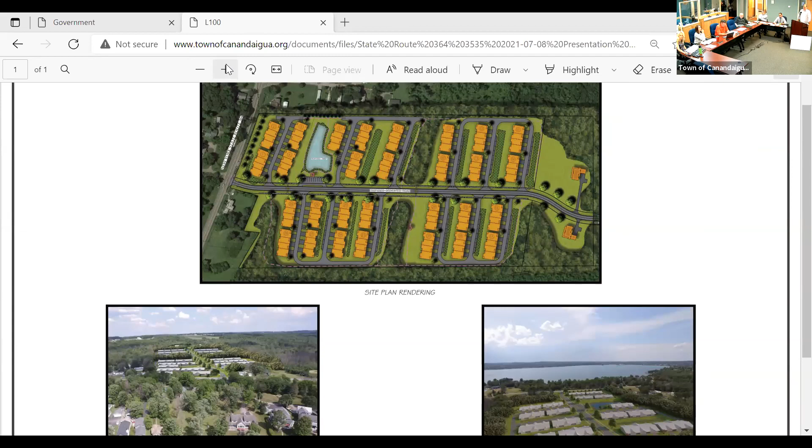There'll be private access driveways to each of the townhome units north and south of that dedicated road. These units will be marketed toward young professionals, empty nesters, people selling their estate and trying to downsize, whether they're snowbirds or permanent residents of Canandaigua.

Some of the comments from the last meeting, which I outlined in the letter on July 1st to the town planning board, were about sidewalks and crosswalks. We've added sidewalks on both the north and south side of the dedicated street, and added 2 crosswalks, one at the kiosk area and one at the gazebo area, for pedestrian access through the site.

These will be raised crosswalks to control traffic speed. It's going to be a 30-mile-an-hour road, but you don't want to hit these raised crosswalks at 30 miles an hour. We provided a landscape plan with the set.

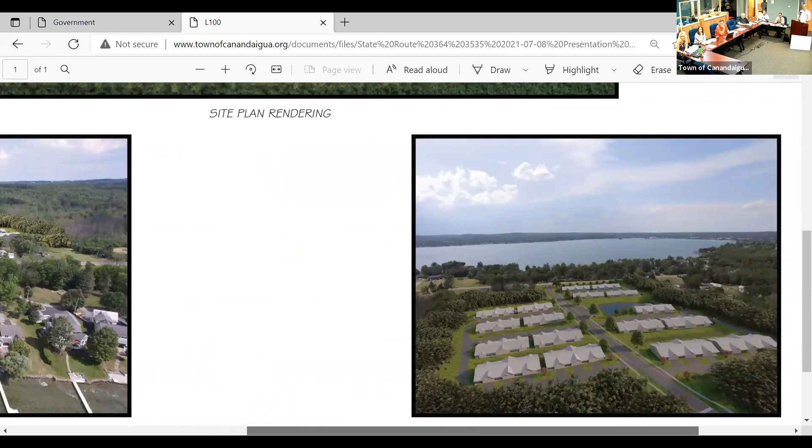We've also provided this landscape rendering and some perspective views of the project. That was one of the board's questions: how is this going to look? If you scroll down, there are perspective views. The one on the left is from the lake, about 100 feet off the lake surface - that's what it would look like. On the right, it's as if you were flying over from the back, from County Road 18.

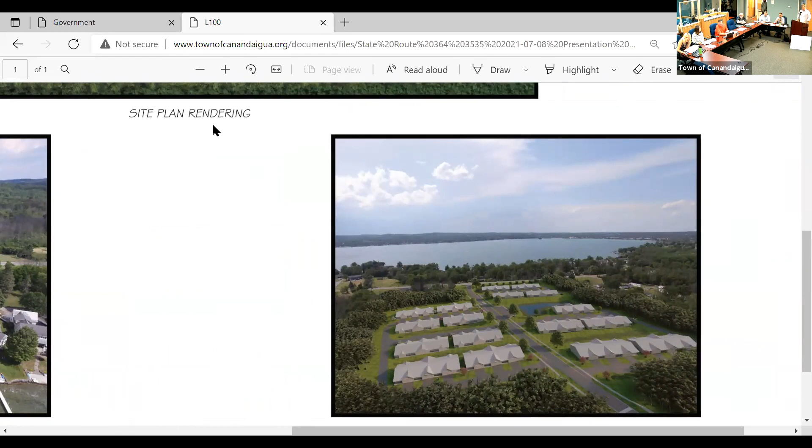Another question was about building materials - what are these going to look like? We provided pictures of a project being completed by the same developer, ATL Contractors, in the town of Milo and Penn Yan. These will have similar appearances to the Seneca Shores development in Penn Yan and Milo: vinyl siding, earth tones, cedar shake gables, townhome appearances - pretty standard for most townhomes in the area.

We've added some fire hydrant locations - I'm not going to elaborate on that anymore. In terms of trash pickup, these will be toters, private toters stored in the garage of each townhome unit.

One of the comments Gary had was about the intersections of the driveways, and whether there was a way to stagger the private driveways on opposite sides of the dedicated road. We let topography and elevation of the site, including a steep slope region in the center, drive the layout. We did not think aligned entrances opposite the dedicated road would present a safety concern, though it may cause a little traffic confusion since this is a low traffic, low speed road. If we were to align them, some entrances would be at a skew angle, causing a safety concern due to blind spots.

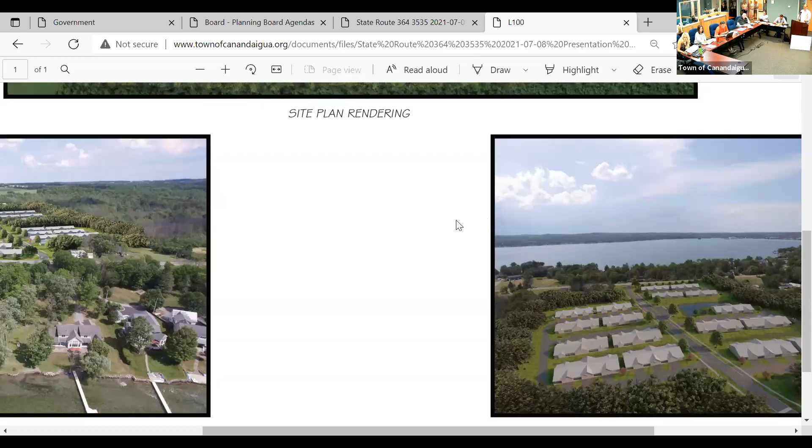In addition to the driveways, I want to talk about traffic, because I know this will come up. We've provided a traffic impact statement for the project showing the generated traffic for the development versus traffic on 364 and County Road 18. It does not merit a dedicated turning lane on 364 — it marginally warrants one, but only during peak time, not AM time, at a level of service of C, which is generally where you may tip toward needing a dedicated turning lane. As for green space, we are proposing 40% green space, which aligns with the mixed use overlay zoning criteria.

In terms of wetlands and streams, it's been identified that there may be some on this site. We've gone further with Environmental Resources LLC to identify and delineate possible wetlands. They walked the site and identified a small wetland in the southwestern corner, approximately one-tenth of an acre in size. It is non-jurisdictional in terms of DEC or the Army Corps of Engineers, and not mapped. We've solicited information from the Army Corps of Engineers regarding jurisdiction. If it comes back non-jurisdictional, it won't be enforced or controlled by anyone, so we'll be able to remove it.

There is a ditch that crosses the site from north to south, about where we have that stormwater management pond. The ditch is dry right now — we sent in a picture showing how the water doesn't flow in it. It is not a classified stream by the DEC, and again, it's non-jurisdictional at this point.

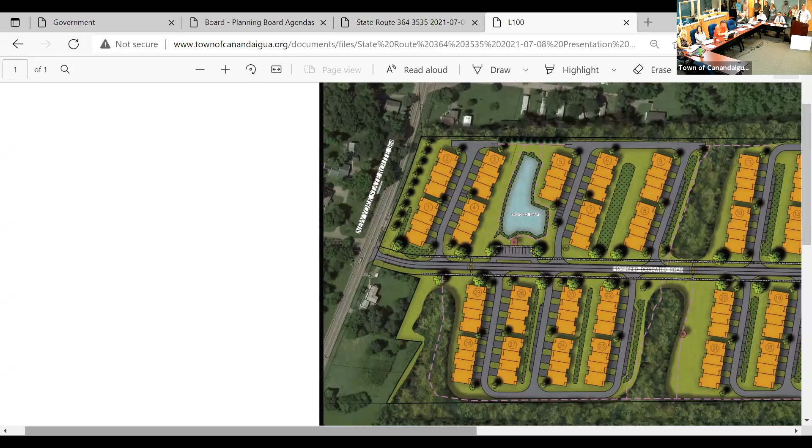Brandon, is 1 and 2 actually on top of the knoll there, where 3 and 4 go down into the dip? No, actually, they're gonna be recessed. And they'll be approximately, I want to say, 6 to 7 feet below the East Lake Road.

Yeah, that would help with the sight, but it would also help to keep those trees there. And plus it would help with the runoff, not tearing up the trees right there on the road. So 1 and 2 units would be 7 feet lower than New York State Route 364.

It'd be great if we could keep them there and keep the drainage. Yeah, I want to clarify a little bit of that drainage, Bob. The low point of the site is approximately 200 to 300 feet off of New York State Route 364.

And that low point is where the ditch has been noted, and that's approximately 19 feet lower than 364. So it goes down 19 feet to a low point and then goes up the hill. So there's no opportunity for water to run straight down this new road and back up on 364 - it'd have to be a 19-foot swell.

I understand it totally, and I'm glad you said that, because I walked that property and I was like, I'm going down, down and down before I go up again. And that's where I would assume there might be even a retention pond behind 29 or something like that. Or where's the water run - does it run to the north or the south there?

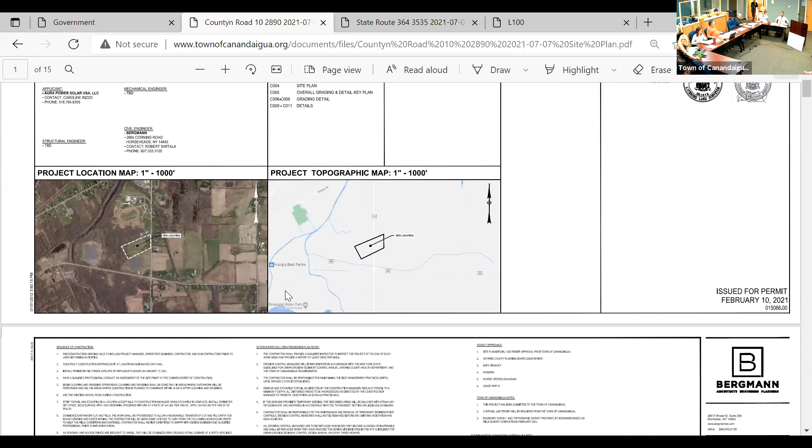I thought I read that there's still discussion going back and forth between DEC or the Army Corps of Engineers as to whether that's a prohibited wetland area, and if so, you can't do anything in that area — drive piles or pilings into it, or whatever.

The short answer is you can do anything in a wetland as long as you get a permit from the Corps and/or DEC. It's not necessarily prohibited. We've already gone to that step and requested a permit, submitted a full application, a copy of which has been provided to the town — a joint permit application to DEC and the Corps of Engineers.

We are under a tenth of an acre of permanent impact, so we didn't have to submit a pre-construction application to the Corps, but we did so anyway just so we could have that letter, that permit, back from them. We're under the threshold — if you're under a tenth of an acre, you typically don't have to even apply for a permit.

We also went to DEC because we have temporary impacts to wetlands that are over a quarter acre, so we're required to get an individual water quality certification. The letter in your packet from DEC is a notice of incomplete application, because they cannot act on that permit until you issue a negative declaration.

At which point they will issue that permit. I know it sounds a little chicken-and-egg — you cannot issue a permit in this state without SEQR being completed.

The Corps is a federal agency, they're not bound by that. And the town through the review did require a jurisdictional review be done, which was done and entertained. As Dave mentioned, they've already submitted the permit application to the Corps to obtain that permit, which technically speaking they're under the threshold. So when you're over the threshold, you're obligated to get an approval and a permit, and a lot of times associated with that, you're obligated to do mitigation. This is under all those thresholds where they don't have to, but they still requested a permit just to get approval to allow them to do this work, even though it's not required.

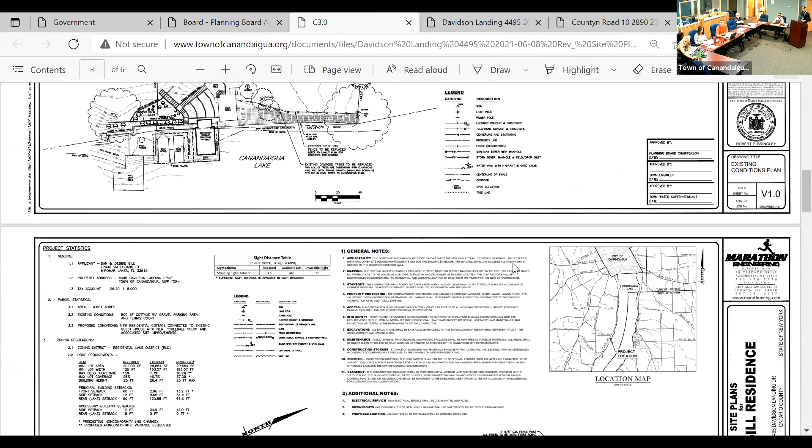As mentioned, we went to the zoning board, and there's the site plan. The shaded area is the home, and it includes a lot of outdoor spaces too within that, so it's not entirely enclosed. There's some covered patios, some entry areas that tie it to the property. You've got the associated driveway with the improvements and the pickleball court.

Overall, in the project, the impervious area on the site is going down—it's being reduced quite a few percent. That was achieved by eliminating the existing guest house and, as mentioned, positioning the new structure thoughtfully to maintain the green areas. There's a pickleball court so that they can stay active on the property, and we'll be updating the dock area as well to match the architectural improvements of the property.

Debbie is on the line. I'll let her quickly introduce herself to the board and say a few words about the Gills' history on the property and what they're looking to do with the project.

Hello, how are you? Debbie Gill, 4495 Davidson Landing. My husband Dan and I have been going to this property for over 35 years. His parents owned this property and the property next door, and we've known the neighbors for 35 years. We really understand what that street represents, and we're trying to keep very much in with what's appropriate for that street, hoping to make a house where our family, which has grown now to large sizes, can go and enjoy our vacation as well.

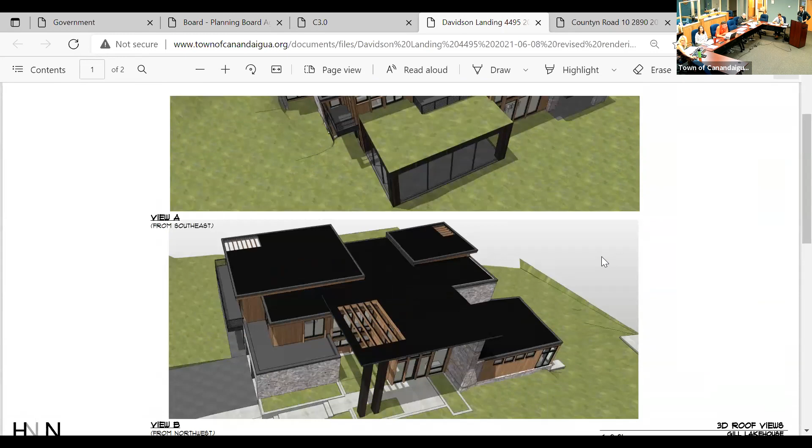If the board has time, I'd like to give David just a few minutes to step you through this building. Sure, it's certainly an interesting building. Tell us about the grass roof—with sheep up there?

Good evening, board. David Hanlon, Architects, representing the Gills. They requested something a little more contemporary in style, which lends itself to the building height requirements, because it's tough to achieve 25 feet with some of these sites. So the style they're looking for, as well as the town's requirements, kind of went hand in hand.

We also tried to get the building coverage down as tight as we could. The building coverage is actually under the town requirements—it's just that we have some horizontal nature to the roof overhangs and the porch, and that's where the variance came in. But we mitigated that with a green roof over the large porch that faces the lake.

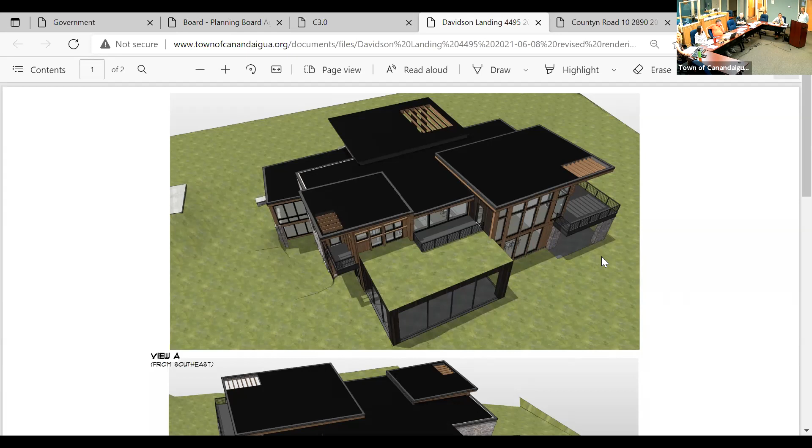Otherwise, it's just—I hate to use the word contemporary, but everybody kind of knows what that means—and it has a lot of natural materials. We show a natural wood; it might be cedar, or a different material with a pre-finished quality for better maintenance. There'll be a mixture of wood, stone, glass, and some metals, keeping the building low and horizontal in nature, using natural materials so it settles into the hill. Davidson Landing has a hill that rises up behind it, so the building settles into the landscape there.

And that's just a quick summary of the project. Very nice, yeah, thanks David.

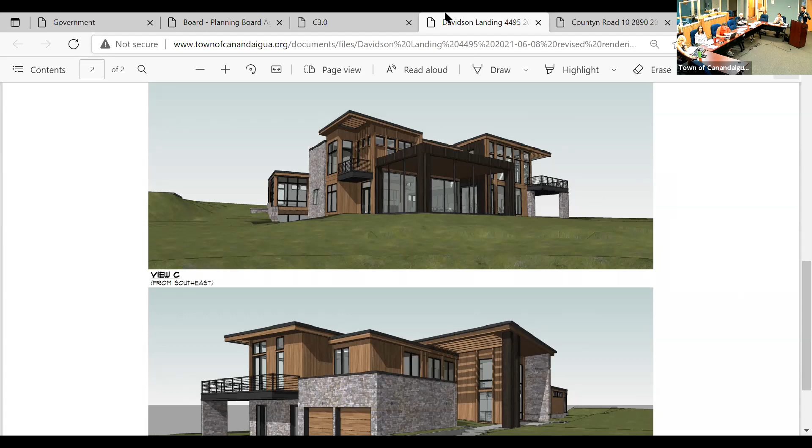What these renderings don't show is the landscaping that'll be existing, preserved, and proposed to enhance the property, complementing the natural materials in the building. Those materials will be repeated throughout the site. A lot of the walls around the site, what you might call retaining walls, aren't really retaining walls — they'll be landscape boulders creating a natural look across the property.

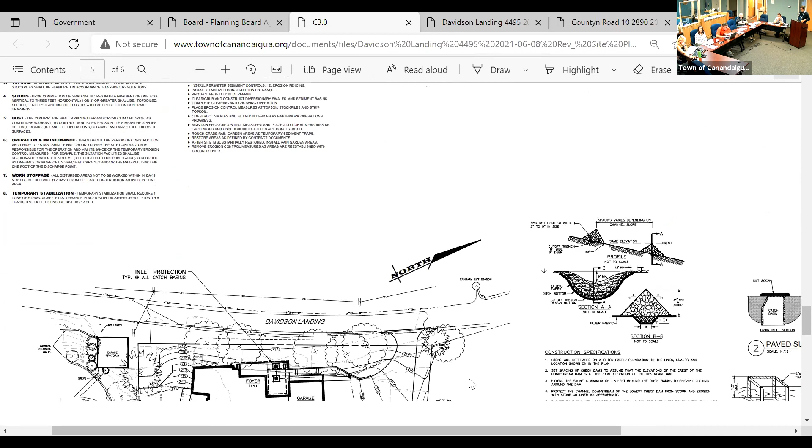David mentioned building coverage, and we talked about lot coverage, doing everything we can to get those down. The stormwater will be treated with a rain garden, so we're reducing the impervious area. We're incorporating a green roof to mitigate impervious impact on the property, and whatever impervious area is left will discharge to the rain garden, further improving stormwater conditions. So not only are we reducing runoff by reducing impervious area, we're treating it well with the rain garden.

The Gills are also incorporating geothermal elements for heating and cooling the home, which adds an environmental improvement to the project.

Is that shown on the plan, where the geothermal field would be, or is it out in the lake? No, that's not on the plan yet — it'll be on the building permit plans, how that's achieved. It goes straight down. I know it goes straight down, but what's the area of influence — where are you thinking of putting it on the lot? It'll be straight down under the home. Under the home? No, to the east or north of the house, near the pickleball court. Oh, near the pickleball court. Thanks.

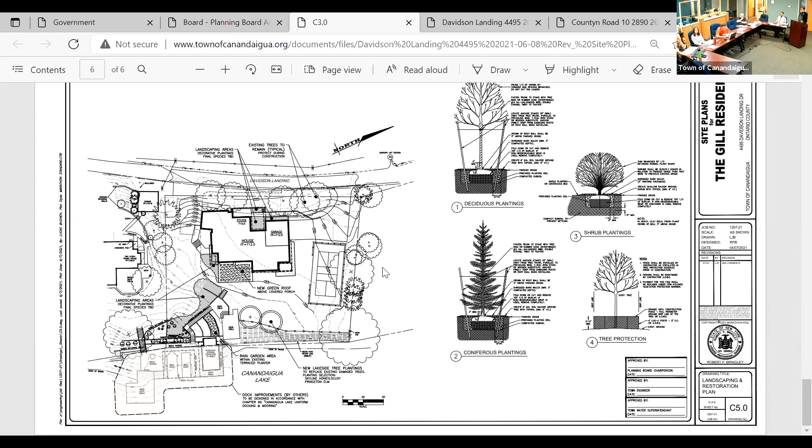You're obviously concerned about shoreline guidelines and making sure they're complied with. I know you've got a lot of existing trees that'll help meet those standards. You're taking one tree out that's become infested with some kind of bacteria or ivy — yes, there's a bacteria growing, so where you see the two new plantings, those are replacements, because those trees are in a compromised position. And you've got a couple trees coming down for the driveway, correct, on the northwest corner of the property. Those will be a maple species or honey locust to match the other trees along the shoreline.

Do you have any concerns about the shoreline or the view? My only concern was, I don't know from the lake how much of that pickleball court you're going to see, and I was wondering if there should be some plantings in front of the fence on the east side of the pickleball court. That's one of my notes — maybe some shrubbery along the pickleball court so people aren't just looking at people playing pickleball all day.

Gary, I was down there, and that tree by the lake is pretty massive — it's a huge shade tree. My concern on the pickleball court is how the water is going to run off of it. That's a good point, if I could speak to that — the tree is really low hanging as well, not only massive but low hanging, so it does provide a visual barrier on that corner of the property.

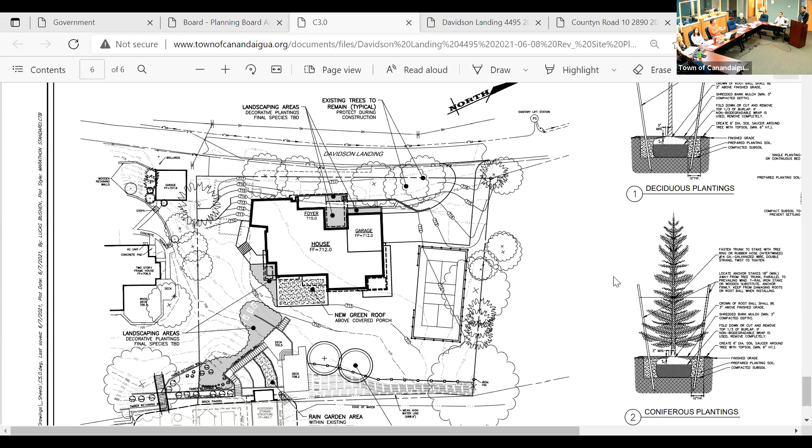Can you talk more about what you're doing down by the lake there? How much of that is new, how much is existing, how much is repair versus replace? What's going on down there? Also, I don't know if this is legal's opinion, but it appears there's work being done on two different properties down there, jointly. Do we need another permit from that other property? Do we need an easement? That's the whole thing that concerns me.

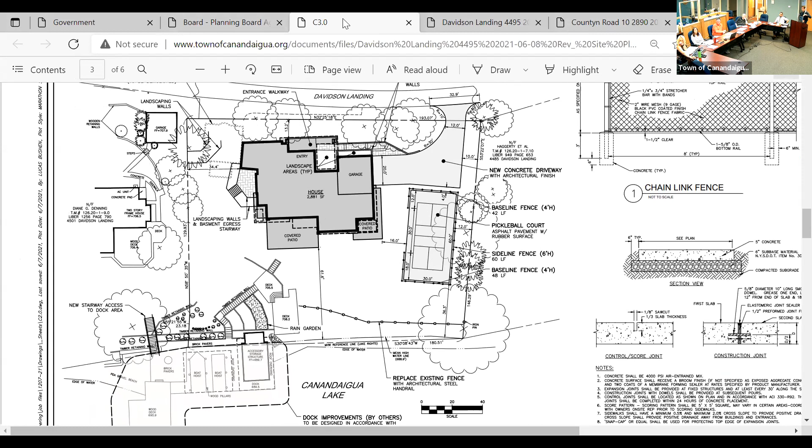So I talked about this with Chris Jensen. The work on the neighboring property, which is the sister's property, is just providing her another stairway access to the lake, offsetting that by eliminating some stairways she has on her property. That will be a separate permit. The way he wants to handle it is that it doesn't rise to the threshold of a site plan, so we're showing it here just informationally.

Same location—are you kind of replacing the stairs? There was a stair there in the past, yeah, that was removed at one point. So in order to make both properties function on their own, they want it back. They're going to give up some other stairs, but that'll be its own building permit application, just shown informationally on this plan.

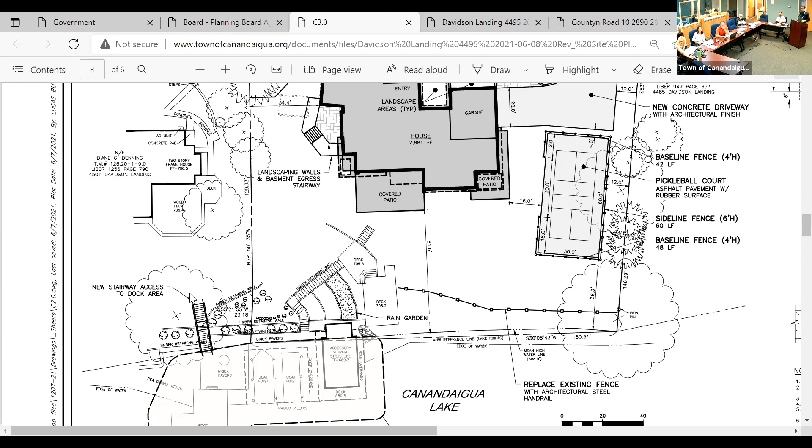Good, okay. You're talking about the dock area in terms of what's happening down there, that whole area—there's a lot of... You mean the shrubs snaking around? I'm not worried about the shrubs, I'm worried about the retaining walls—is that all new, or is it being repaired? It's all existing, it's all there today, it's all timber retaining walls.

The idea is just to update those with some stone and natural materials, some updated landscaping. And those steps are starting to wear out, they've been there a while. So the idea is a similar access down to the lake with a stairway and some terraced landscaping.

The rain garden is new, right? The rain garden is new, yes, but everything else is just repair. Everything else will be updated with new materials. The deck sitting up there will stay and will be updated as well.

Is that rain garden—I know we sometimes have concerns about the outfall or overflow of the dry well being too close to the lake, that it would surcharge and go right into the lake. We try to keep it some distance back from the lake so it runs overland before—how close is your surcharge or plunge pool, whatever you want to call it, when the rain garden fills up and overflows?

Yeah, I talked about this with Colin from MRB. The discharge—it's probably about 10 or 15 feet that it'll run through a rocky riprap area.

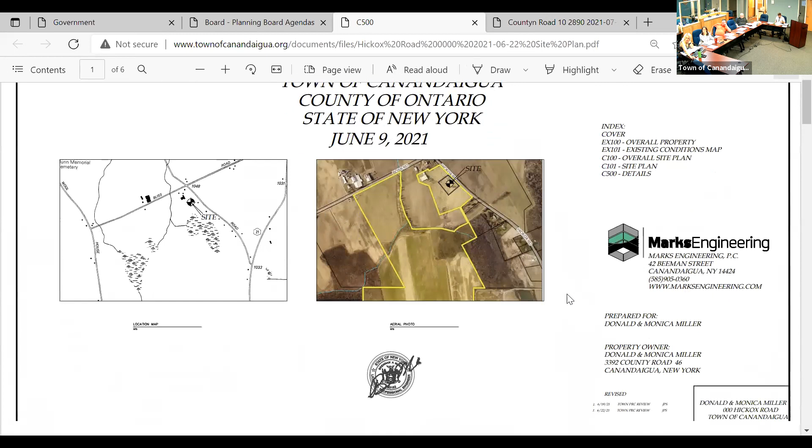We're looking at a new residence, right before the corner of Hickox Road and Bliss Road. It's a recently subdivided parcel, about 12.5 acres of vacant farmland. There's an existing barn in the lower corner that services another portion of the property, and there's also a DEC wetland located in the southwest region of the parcel.

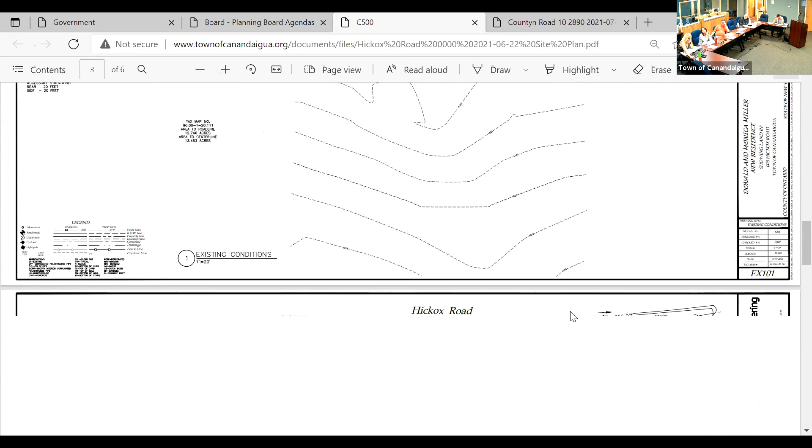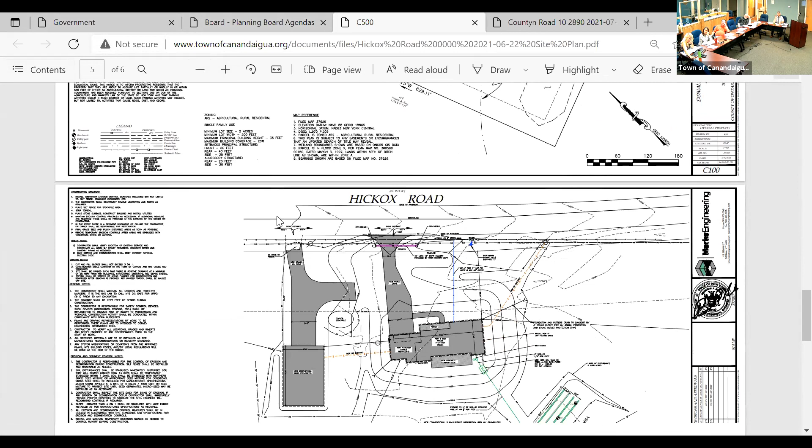What the Millers are proposing is a single family home, a 3-bedroom house with an attached garage, patio in the back, and an agricultural barn as well. If you scroll to the next page, that shows it in respect to the whole property, and the next page will show the actual plan itself up close, which will give you a better idea of what we're looking at.

They would like a new conventional subsurface wastewater treatment system. We've done perc rates out there, everything's looking good, we did a deep hole test. We've accounted for stormwater runoff, trying to move the water away from the home. They'd like this additional gravel drive because they'll have to be pulling in equipment and they'll need to turn around in that drive to back that equipment into the barn.

I've also got architecturals from Morabito Architects out of Pittsford, New York. I don't think they're with us today, but it can give you a good idea of what the house looks like if you'd like me to screen share that. I'd be happy to answer any questions the board might have about the house.

Also, Don and Monica, if you'd like to introduce yourselves, you can come on and just say hello. Totally up to you, they're here. Hello. They're shy.

We kind of rushed here, so I don't have the site plans with us. But it's ranch style, 3 bedroom, 2.5 bathroom home, single story.

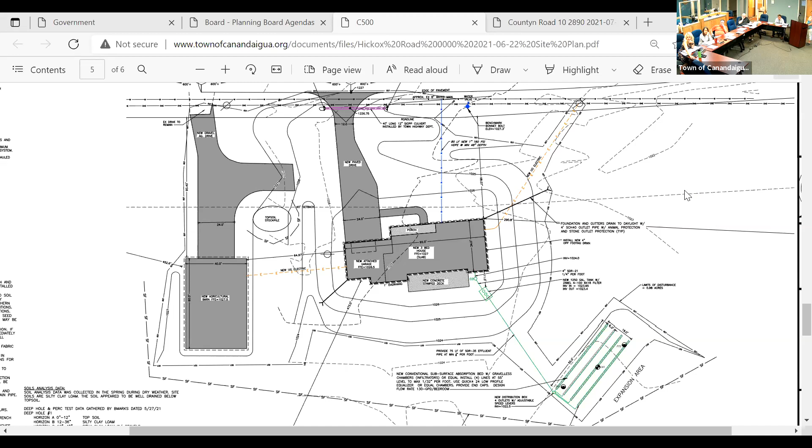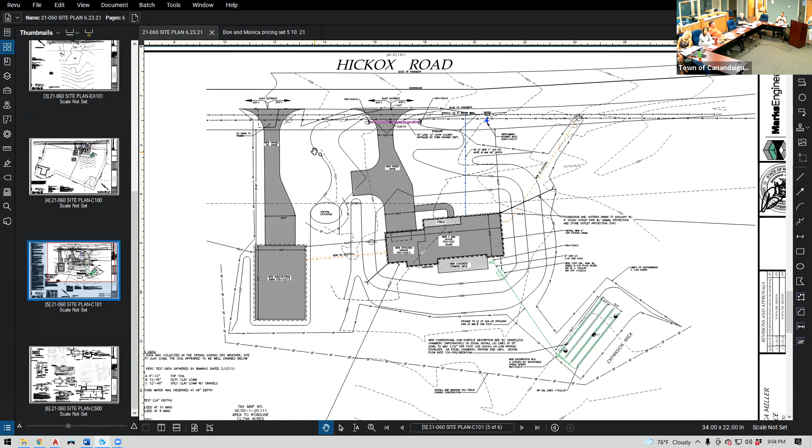Regarding siding colors, we have a neutral siding - is it cedar shake or what? We're going to do vinyl siding, dark blue or dark gray, nothing decided for sure yet. We have possible builders. Obviously not bright pink or anything like that - though I think Don would allow bright pink. No, doesn't match with the farm.

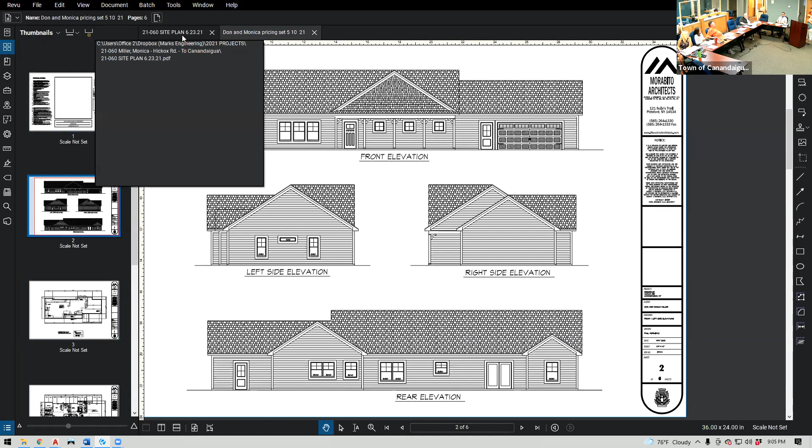The existing barn you have out there in the corner, is that being used or is it continuing to be used? Yeah, our farm uses it. Are other properties going to have to access that barn? No, it's on your property, you're the only one that uses that barn.

Right now we use a driveway coming through the neighbor's as a right of way, but with what you're doing here, would you be able to get to it another way? I can just drive across that field into it if I want - it's just an open field, used to be a pasture lot.

We used to have cows in there for years. It just sits idle now - we sold the dairy, so it just sits there. Is there an actual driveway of any sort that goes to that barn? There is, around the backside, it goes through my cousin's property.

So there's an actual driveway that goes there, okay, but through a different property. So if the cousin would sell and the new owner said you couldn't use it anymore, would you still have access across his own property, I guess? Yeah, that's right, that's fine - we'll figure that out.

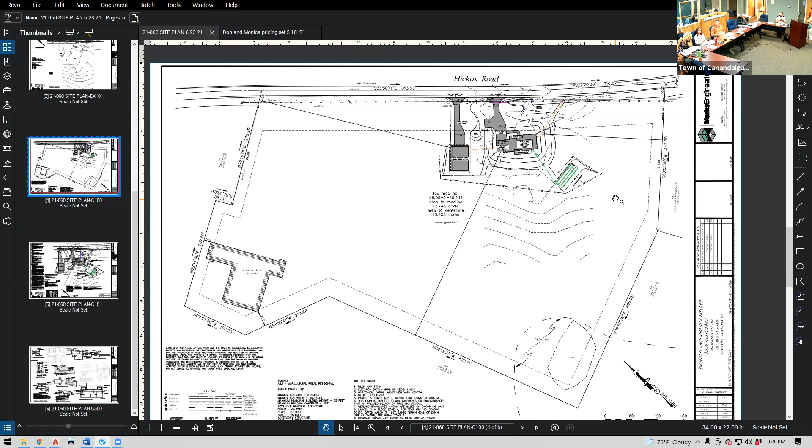So you have two driveways, one being an ag driveway and the other for the residence. I think Chris Jensen had responded about two driveways to a single property, something like as long as one was ag-related. The one to the home is going to be paved, right, Don?

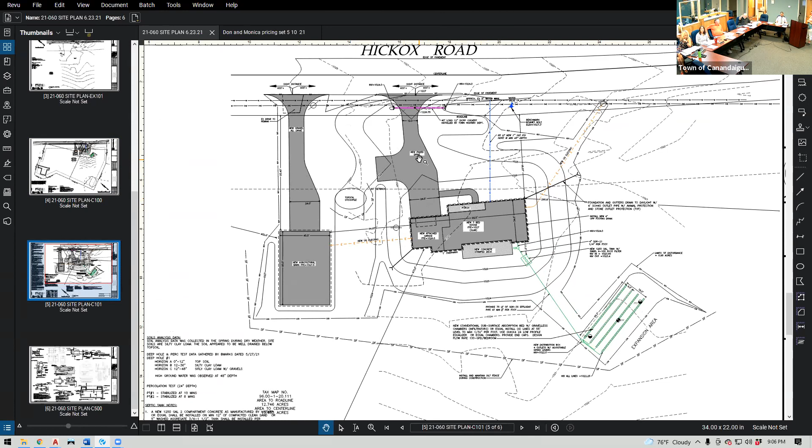Yeah, the full driveway. And the one to the barn will be stone, except for the portion near the apron. That's what I just wanted to clarify.

I see you have a new driveway culvert that'll be installed by the town highway for the house. Actually, I don't know why they'd put a culvert there, it's just flat, there's no ditch. So the blacktop can come right off the road. But you need it at the residential.

The reason for the paved apron, in case you weren't aware, is that the town road requires all driveways connecting to their roads to have a paved surface so the stone doesn't get washed away during winter maintenance. So everything inside the right of way has to be a hard, paved surface. Everything beyond that point can be gravel.

Peter, this is Bob. I had a question. On the picture I'm looking at right now, it's opposite of what we just saw—the turnaround was on the barn side and not the house side. Which one is it? I think we've actually changed it since then.

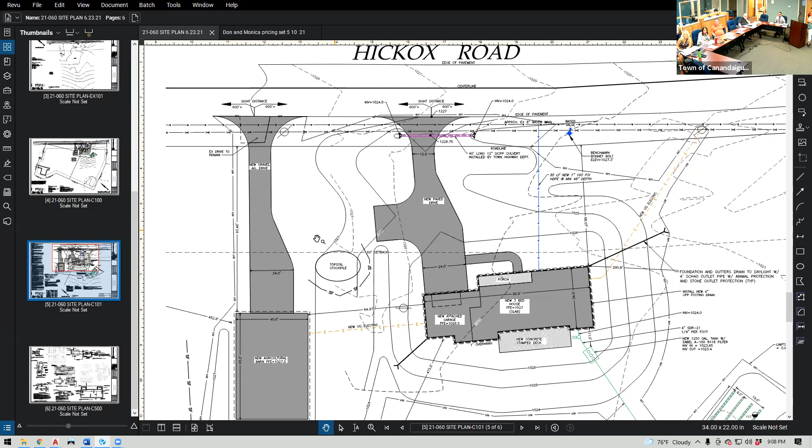I thought we had the same copy here. We originally had it coming out to the right over here, and then I spoke with Monica and Chris Jensen, and I realized Monica preferred it to be over here for a turnaround for the garage. So that must be a mistake on my part—the plan we have is incorrect. Is that what you're saying? I'll let Monica clarify, but I believe this is the design she wanted, shown on my screen.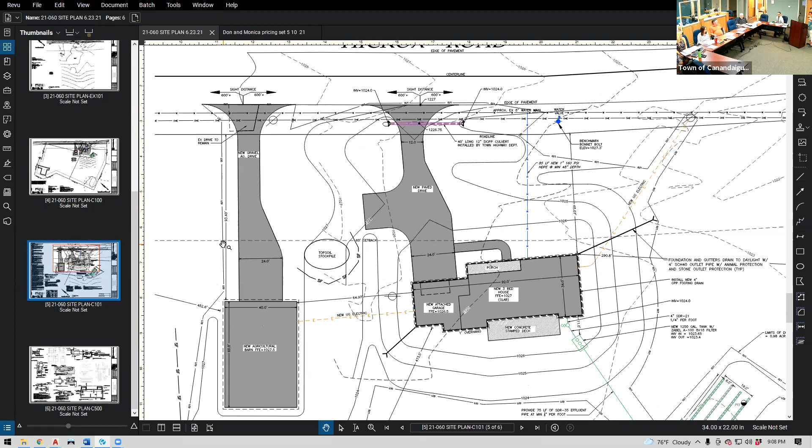Is that the last rendering? I've seen a few pictures. Yes, both—I do want the turnaround as pictured here, but we will also need a turnaround on the other driveway for agricultural farm equipment, like a back-in area for purposes, like Pete had said earlier.

Why don't you connect the two? You don't want to? There was an issue—I don't think you can do that. You've got to separate the ag driveway from the home driveway, because if they're connected, the agricultural use would be tied to the residential use in theory, and therefore it would require a variance. You can't have two driveways connected. So you have to separate the two.

Thank you, I was just saying how it reads. But for my instance, the plan we saw on site is not the correct plan—that's what I'm trying to get to. Yes, you're correct, both driveways will have turnarounds, but they will not connect. Yeah, you're right, Bob. Thank you.

Will the two turnarounds be facing one another, or facing the same direction—meaning, will they be close enough that you could in fact connect them? No, they won't be facing one another. I won't drive on that end; I don't know that I have an issue with it, I was just curious. I wouldn't drive on the other end because the machinery will wreck the asphalt—it's too heavy. So you don't want them connected. Right, no, they won't be.

Okay, as long as we somehow reflect that the final site plan will show the two turnarounds, the ag driveway and the home driveway. Okay, that's simple enough—we will make you come back for that.

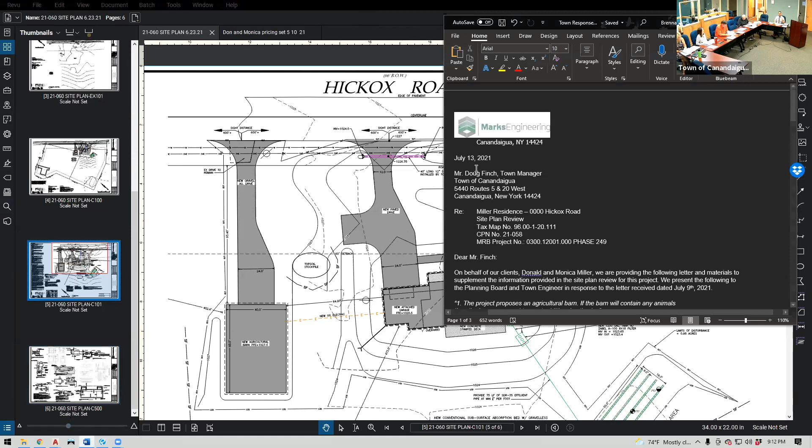So you reference it in the resolution? Yeah, so my letter's referenced in there that covers the apron, but I added two conditions: one, Jim Fletcher's comment letter being a condition of approval, and the other was the final site plans to show the additional driveway turnaround for both the barn and the residential house. Are we good? Anything else?

All right, I'll take the formal motion on both the SEQR type 2 and the site plan. I will make a motion for SEQR type 2 action and bundle that with the site plan approval for 058 at an undisclosed address at Hickox Road, with 8 conditions written during our discussion here this evening. Have a motion? Second from Gary.

The conditions include the set aside for the park. It does, site plan, okay - it is condition number 6. And the motion, second, all in favor? Aye. Opposed? Okay, motion carries. Thank you, folks.

Are you from the area? Well, you said your brother lives - is family, their family, his farm, family farm. Oh yeah, okay. I've been here - oh, Miller. Miller, yeah, the Miller, one of the Millers, yeah. One of the Millers. All right, sweet. Thank you, guys.

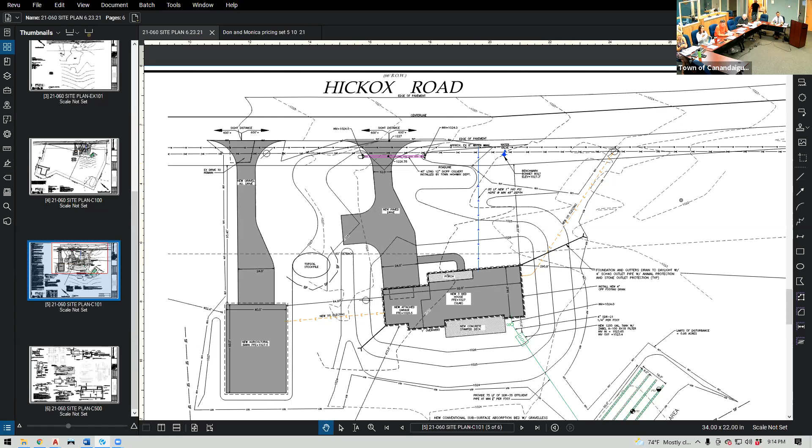We'll move on to the minutes from the June 22nd meeting. Yikes, can't do it. Can't do it. Gotta move that along. Okay, we'll have to postpone that, so just make sure that shows up on our agenda next meeting. Shauna, we have a full board. Referrals from town board.

Hopefully you folks have looked at the comp plan update enough times, as well as the form-based code, and we can sit here and talk about it. I'm certainly comfortable because I've seen it enough times in various committees that I sit in on. Do you have any issues with the comp plan update? No, I'm gonna go to that form code meeting Thursday evening, so I'm hoping it'll be very informative - that's gonna be a good, interesting concept. I unfortunately will not be available.

Be comfortable after that. I have just a couple of things I want to say - on the comp plan, not trying to make the meeting last any longer. We had one of those - that needs to get closer to the mic.

So, in the comp plan, it references the city's exploration of racial and gender diversity. You know where I'm going - I would at least request that the town consider being consistent with the city in exploration of racial and gender diversity, in light of, especially as noted in the plan, an increase in the educated women population over the past 10 years. So that is my request. I did note there was a huge drop in residents in the income brackets between 25 and 75 a year. So combining all of those and having some sort of assessment - I'm not asking to solve all diversity problems, but at least I would like it to be explored and acknowledged.